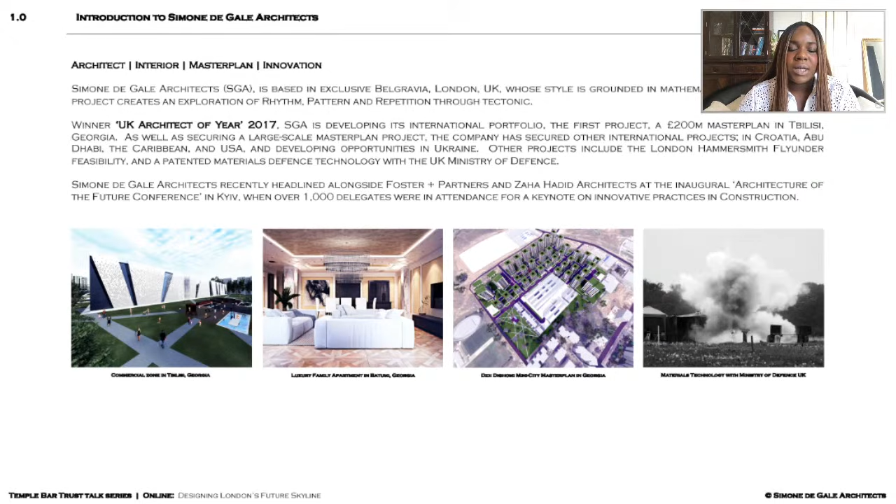So my company, Simone de Gale Architects - this is us. Just a quick introduction here: we do architecture, interior design, master planning, and innovation. We've won a number of awards, most prominently the Architect of the Year Award in 2017 with Women in Construction, and we've just been shortlisted for the Building Design Architectural Leader of the Year 2020, and hopefully we'll be successful with that. We've got a range of projects in London and internationally, and I've built my company up for nearly 10 years now, and it's been a fantastic journey.

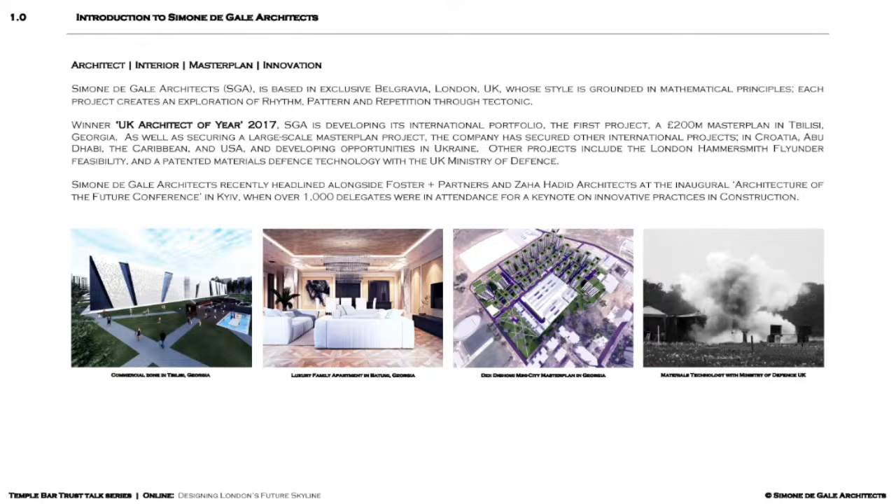So moving on to the London Skyline, I've been doing a bit of research, and thanks to the work of New London Architecture, I've found some really good statistics on the current state of play in London at the moment. At the moment in London, we've got 5 main boroughs along the River Thames planned for 31 or more buildings over 20 floors, and buildings with 50 plus floors are starting to spread throughout London.

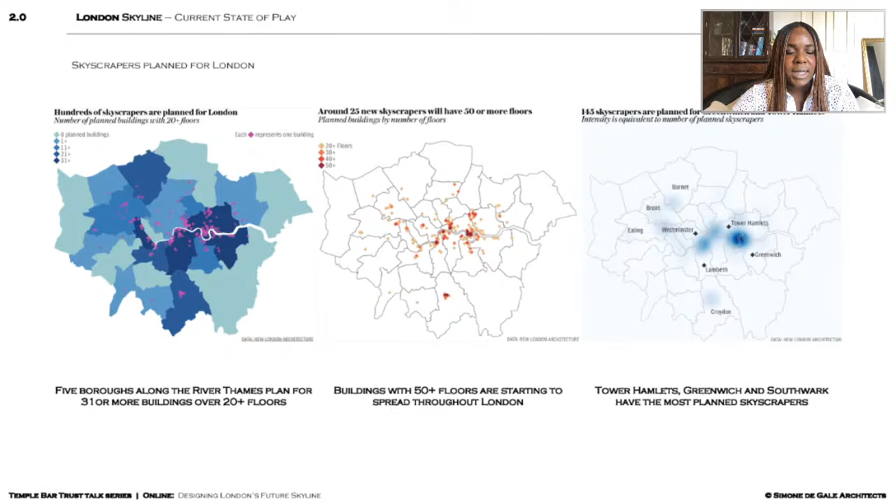So I want to ask why we are seeing this development and increase in the rise of tall buildings in terms of demand. Definitely we have a demand in housing, and I think that would be looking mainly at the outer London part of the survey, because this is where it's mainly residential development. And then of course we've got an increase in land prices, and the lack of lateral space in key locations - this will be predominantly with regards to access, transportation, and being able to be within a proximity.

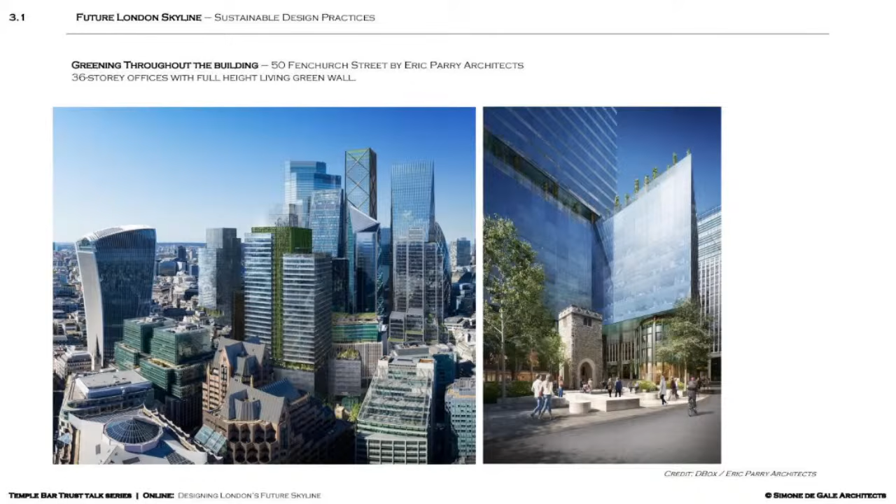And specifically because we are designing these buildings predominantly in London, where we know we've got very high levels of carbon emissions, and it can be quite dangerous in certain specific areas, we really should be encouraging living green walls on all of our buildings, not as a special addition. Of course, this is a precedent, this particular building by Eric Parry.

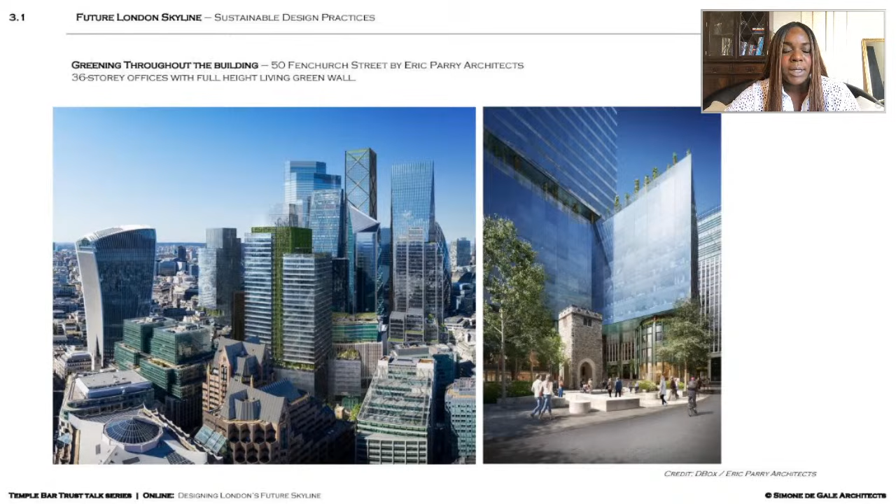But if we start to integrate this thinking into all of our buildings, first of all, we'll be able to have a more holistic environment where we're able to engage in nature, even though we might be in the city. These trees and these green walls actually clean the air for the people living and working in that environment, and that's obviously going to have a positive impact and reduce our carbon footprint. So I think this is a fantastic method that we can use for all of our buildings moving forward.

The next example I've used is 22 Bishopsgate by PLP Architecture. For this particular building, they've utilized the rooftop, and they've animated floors for public use. So number 1 Blackfriars has a mix of uses, but this particular building, 22 Bishopsgate, has much more public uses.

So people can come into the building and utilize that space throughout the day, and there's much more animation in terms of the amount of people that will be visiting that building throughout the day, the type of interactions that you're going to have, and being able to bring real life and animation to that building, even though it's a vertical building.

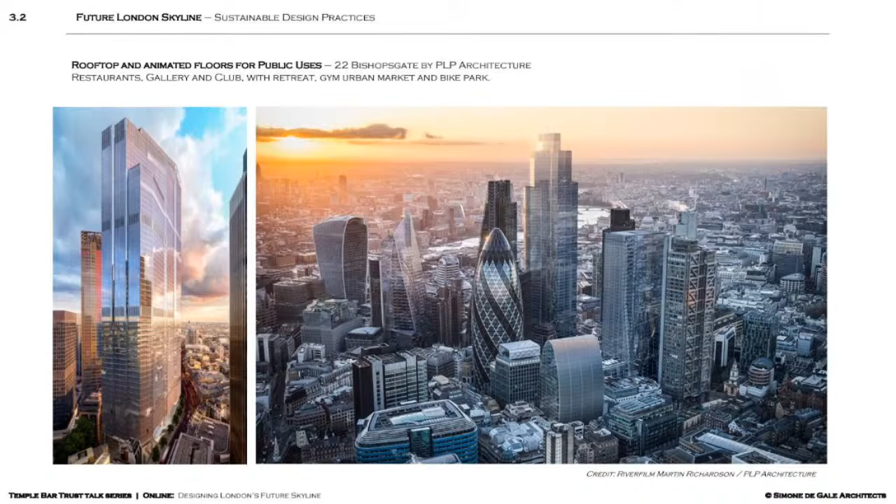And I think that again, this is really encouraging mixed uses within vertical buildings, and then access to the public. Because I think that sometimes when we see these towers, these skyscrapers around London, although they might be beautiful, sometimes you get the impression that you can't get access to this building, and most of the time, factually, you can't unless you have an appointment.

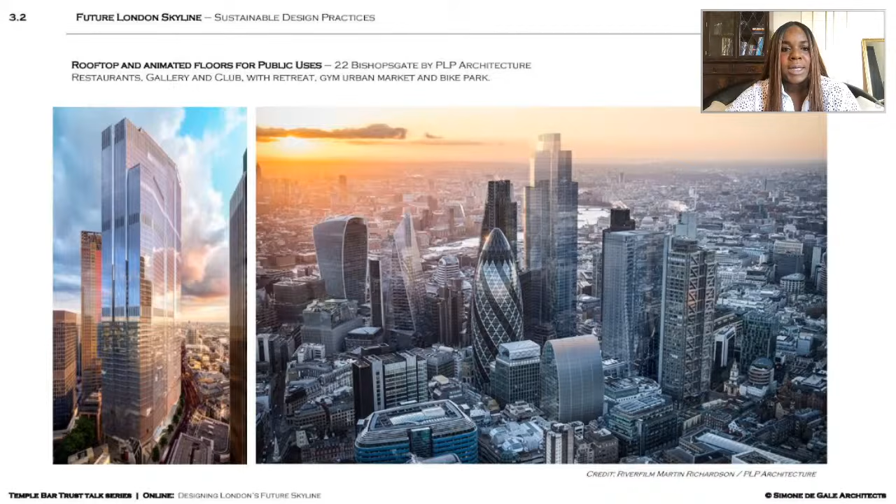But when we start to mix the uses and get more public interaction, the building becomes more accessible, and we can start to have more sustainability in terms of the function of that building and the longevity, and then who it's associated with.

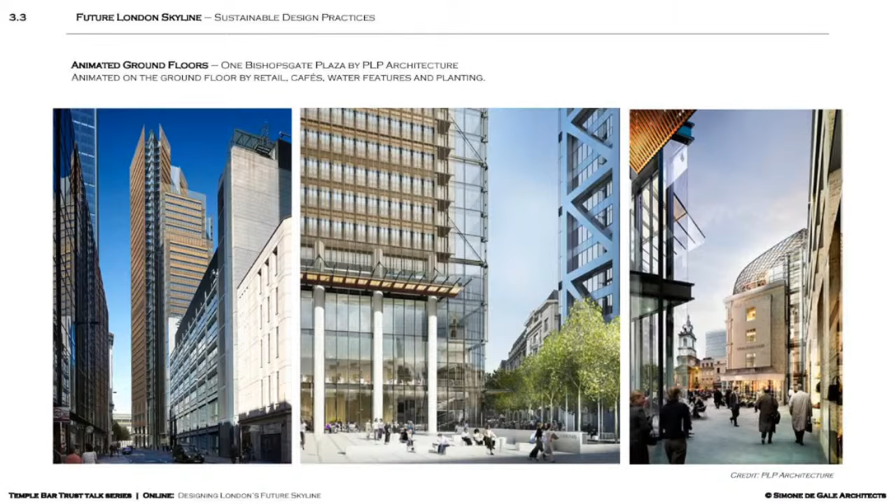Retail, cafes, water features, really bringing life to those spaces, introducing more transparency. We're encouraging all types of people to come and use these spaces, opening it up for social interaction, which is always going to benefit the city and the perception of London as a whole, as an open attraction for people from all different walks of life, while still being able to do business at the same time.

And then this example by HTA. I don't know if you know about this building, but it's been recently completed, and I think it's fantastic. It's a modular constructed building, and it's been delivered within 24 months, so that's 2 years.

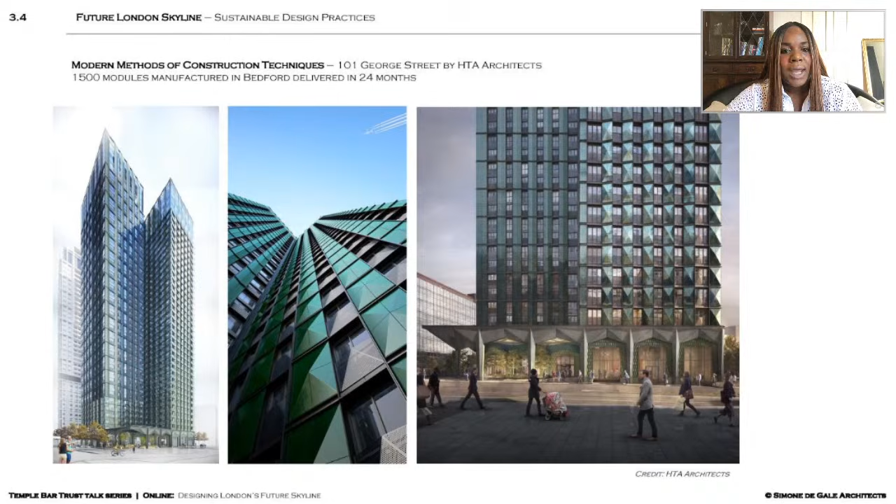And it's a really good example of modern methods of construction. Up until a few years ago we've still been a bit skeptical, particularly about modular design when we're looking at residential, tall buildings, and luxury architecture. But this is one step forward in how we can utilize precision modular construction within architecture, assembling it on site.

And then this is the final example, by KPF Architects, number 52 Lime Street. I really do like this building from an architectural perspective in terms of its aesthetics. This is a tapered skyscraper, and what KPF have done here is shape the building so that when the wind hits at the tall height and falls down to the ground, it starts to slow down the acceleration of that wind.

So if we start to look at ways that we can work with the environment and the weathering that we're bound to have within the areas that our buildings are located, you can actually create something quite stunning architecturally, but that is also environmentally safe and encourages a nice environment that people can feel comfortable walking through.

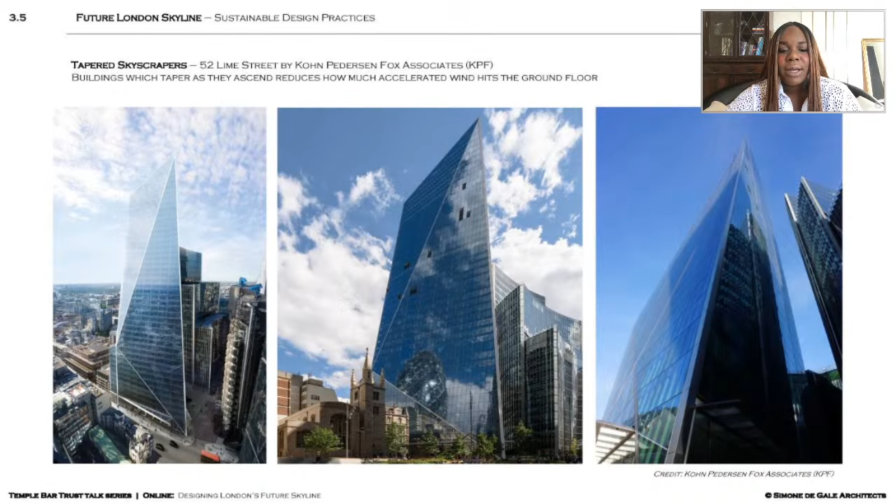So although we haven't designed any towers in London yet, we are starting to get some nice commissions. So I'm going to talk to you about some of the projects we've been working on where we've been able to introduce some of these methods of design.

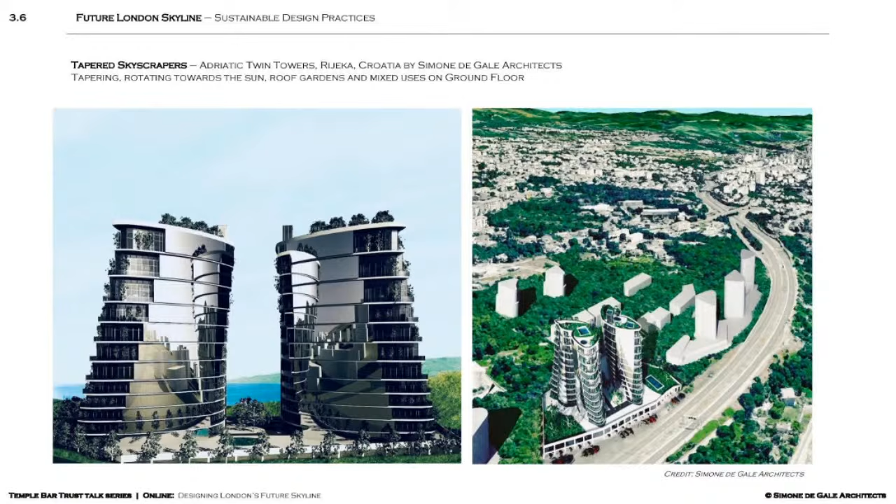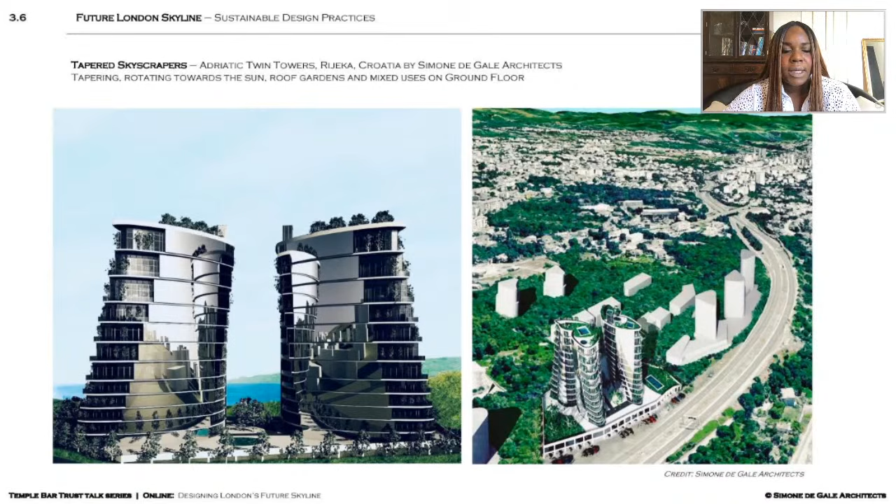So here you can see this is a building that we've designed. It's a luxury residential building for 200 apartments in Croatia, and you can see it's a tapered skyscraper. We're using the same method that KPF used in their design, where we're able to break down the wind. There's also an aspect of modular construction on this project, where we're able to repeat the floor plate, have it manufactured off-site, and then assemble it on site.

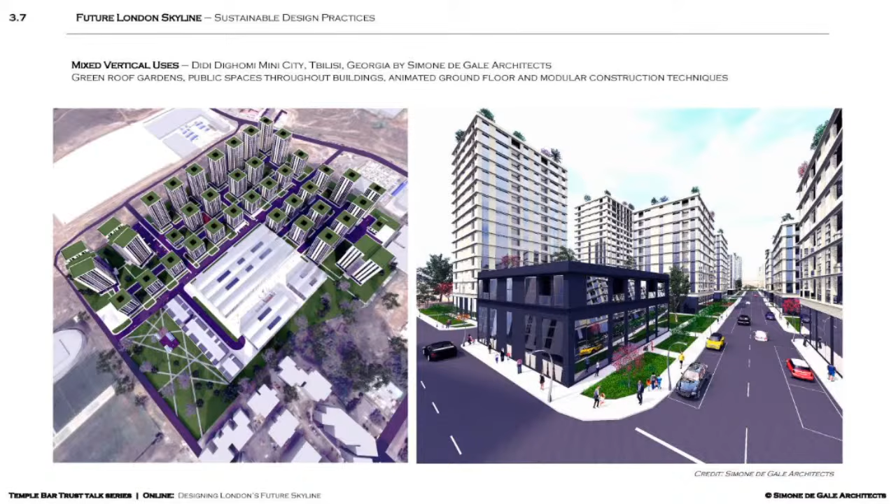This is a project we have in Tbilisi, Georgia, and this is a master plan project for 3,000 homes, a retail center, commercial development, and a luxury park. You can see that we've started to introduce greening throughout this development, on the roofs and throughout the buildings as well, so these tall buildings are able to really bring the environment into the architecture.

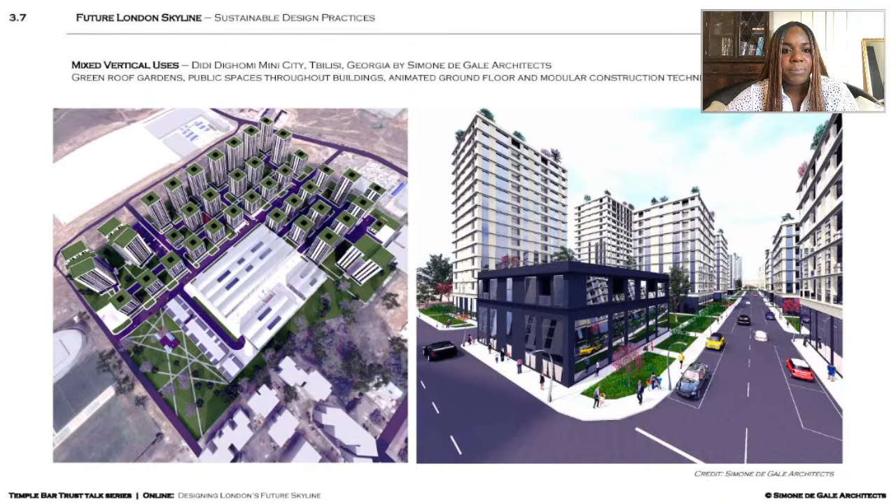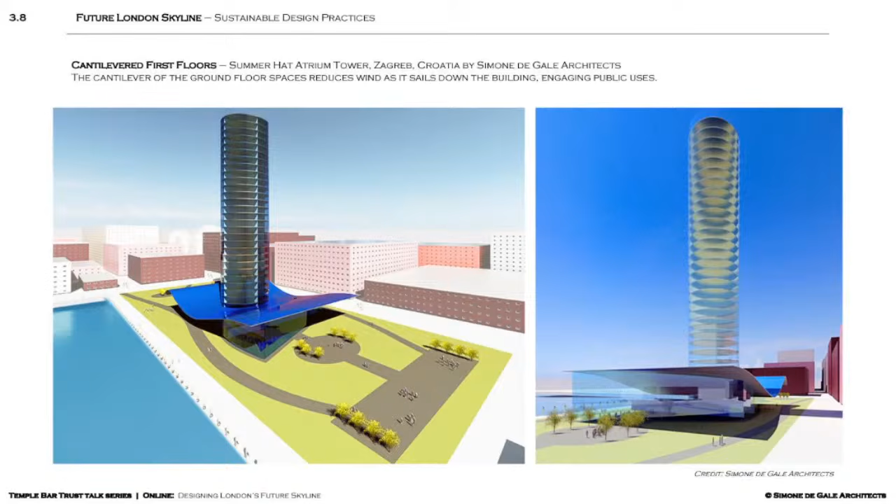And then here this is a competition entry we had in Zagreb, Croatia. You can see we've introduced a cantilever at the first floor. So while the wind hits the tower at the top, because it falls down onto the cantilevered roof, it starts to dissipate that acceleration, and on the ground floor we continue to have a sound environment for people using that space.

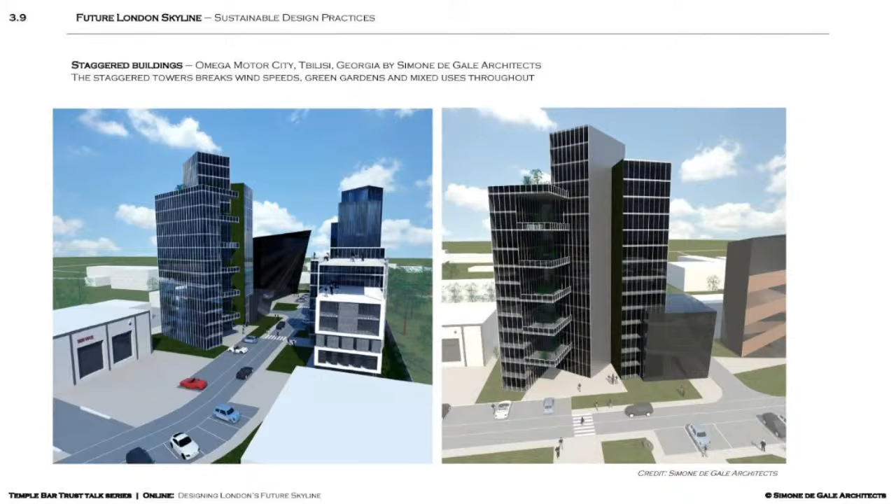And then finally, this is a second master plan project we're doing in Tbilisi, a commercial and retail development. You can see what we've done: we've started to stagger these towers, so one building is broken up into 4 parts, where again we're able to break down the wind within the environment, and we're able to green throughout this building as well. So these are some examples where we're starting to introduce these methods of design, which I believe is quite excellent practice, specifically when we're looking at tall buildings.

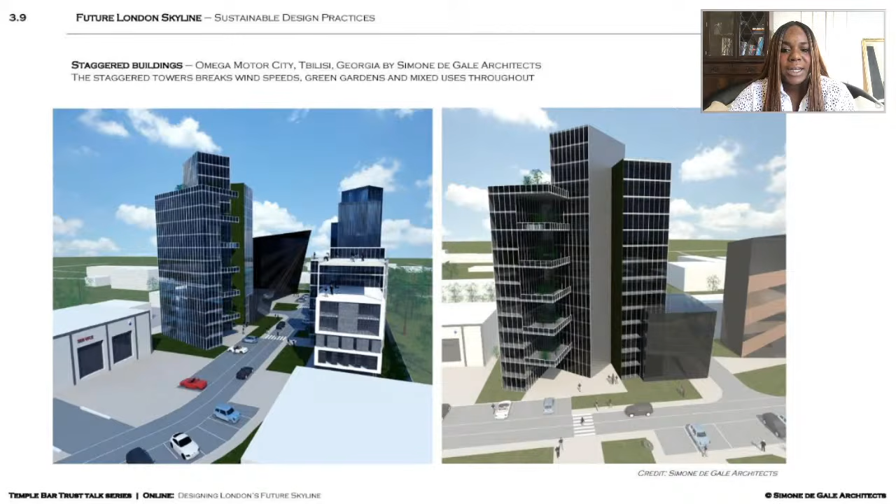So to summarize, in terms of London's future skyline, we really need to utilize our vertical buildings to create spaces for all types of people and mixed uses. I think it's not only for the benefit of society and for all different types of communities, but also for the benefit of the developers and the people who own and lease these buildings, because you're providing flexibility in terms of the space, complementary services and features for guests and for personnel who might be working in or living in those spaces. So it's really a good way that we should be moving forward in terms of mixing the buildings and creating flexibility within vertical towers.

We should also be thinking about the environmental qualities, so that we can have a full holistic experience when visiting these buildings and working and living in them. Of course, we have for some time thought about our surrounding environment and the buildings we're integrating with, but we haven't gone far enough. We have to think more specifically about ground floor interaction and the issues we have with wind, especially in central London. It's like a tornado sometimes when you're traveling down these streets, and it's not a pleasant experience. So we really have to work harder on integrating our vertical buildings with the ground floor, as well as having the animation, public uses, and so forth.

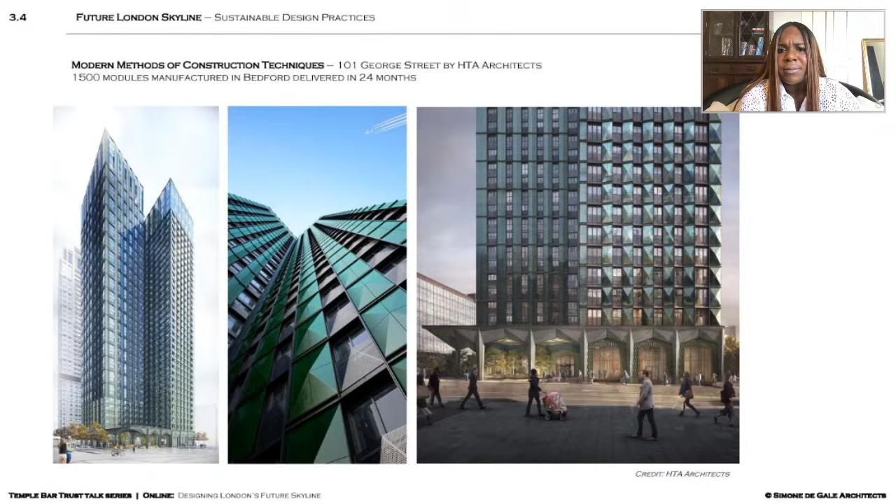I would definitely be promoting this building by HTA, it's actually in Croydon, which is in outer London. But I think it's fantastic. It's completely done by modular construction, and to have that height is absolutely amazing. The facade is interesting. They've addressed the ground floor in terms of having public spaces, and having a cantilever to break down any wind acceleration. I think this building is a real exemplar, and it's starting to win some awards as well, I've observed online, and this is a residential development.

So, have you been involved in any modular or prefabricated—as it used to be called—development yourself? And will you be employing that in the work you're doing in Georgia?

We will be employing that in the work on the master plan in Georgia. And we have done a design for a residential development in London, and this wasn't a skyscraper, but it was modular construction. We used both the modular and the prefabrication, which is slightly different. The modular is the units, building them off site and then assembling them on site, whereas the prefabrication is more about the facade and specific architectural details. This development used both.

So I think modular construction is really something to observe and to employ into designs, because there is still a little bit of skepticism about it, as is always the case with new ideas. The majority are not going to try it until it's been tried and tested a number of times. But that's why I say this example by HTA is fantastic, and we'll definitely continue to use modular design, because I think it's the next step in architecture. It's precision manufacturing—you design it in the computer, and robots actually assemble these modules in a factory. We visited the factory where our modules were being designed, and it's just fantastic technology. So once you design it once, you can't go wrong.